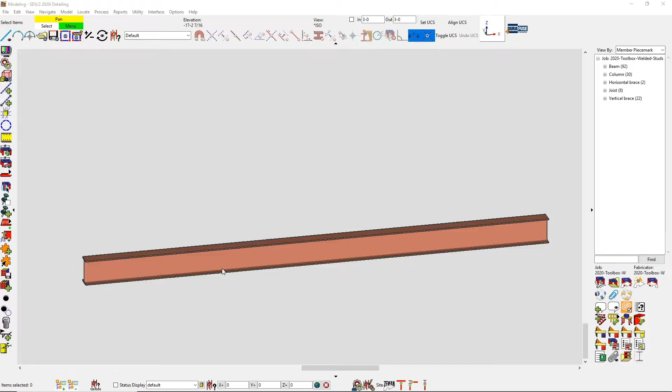This welded stud component can be added to beams or columns, and then it can be a shear or a threaded stud. If it's a threaded stud, you have the ability to add the nut and washer, but we're going to add a shear stud for this example.

When this is selected as a beam, you can add it to the top or bottom flange, the far side, or the near side web. When it's a column, it will be face A, B, C, and D. For your pattern setting, you have fixed or equal spacing. And for this spacing, we're going to put 2 feet.

You do have the option for a pattern underrun. This example will leave it at left end, but we'll show right and equal spacing as well. You have a stud column quantity of 1 or 2. The distance between that for the column, if you want an offset, and then if there's 2 columns, then you can do your pattern. Then you have your minimum lengths for fixed or minimum.

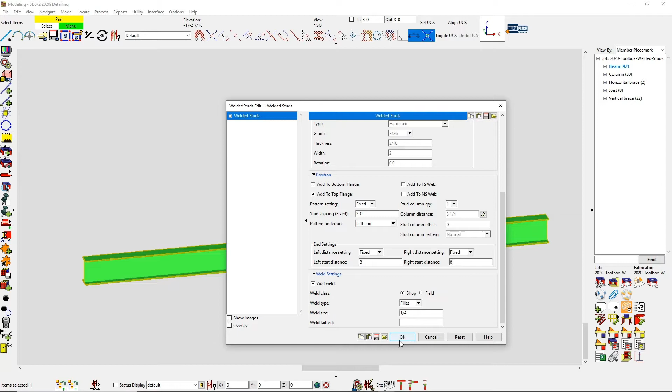You do see here I had my underrun for my left end, but I can change that then to my right end as well. And then we'll finish it off by showing that you can have it set to equal on both ends.

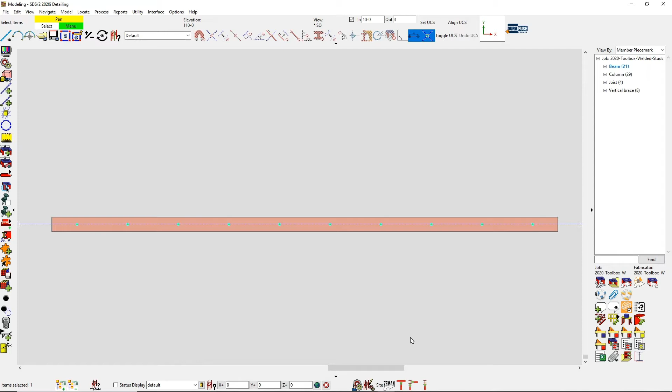Now, more commonly, you will have the left end setting and right end setting to maybe be a minimum distance or a minimum length. If that's set to that, then the pattern underrun is grayed out. If I want different spacing variations, then I will want to run this component twice. So left end maybe 24 inches and right end 18 inches.

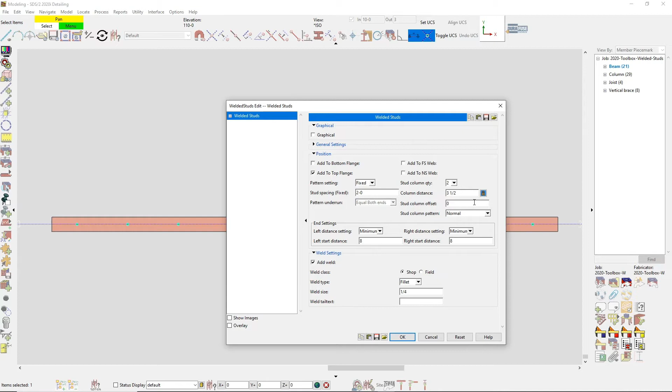This example, I'll do my stud column quantity of 2. This is a known issue right now, but the column distance is supposed to read the gauge line. I know this is supposed to be 3.5, so I'm just going to put 3.5 right now. I had that set to normal for my column pattern, but I can set that as staggered. So I'll start in the back, or I can do the reverse where it could start in the front.

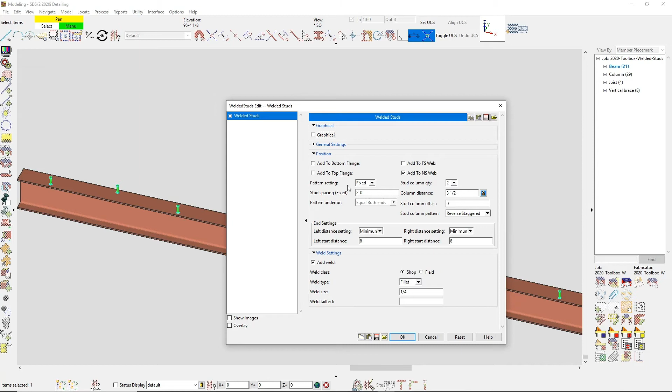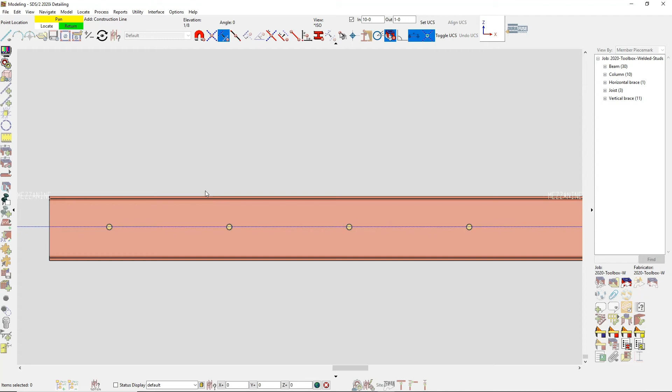We can also add this to my near side, and I could add it to the top flange at the same time, but I'll just change to my near side web. And I'll change this to just be 1 column. So you can see that it will center it at half the nominal depth. I know this is going to be 6 inches for my nominal depth. There is a request to put this for actual distance for half of it. In that case, if you need to do the actual, then you could put an offset in there.

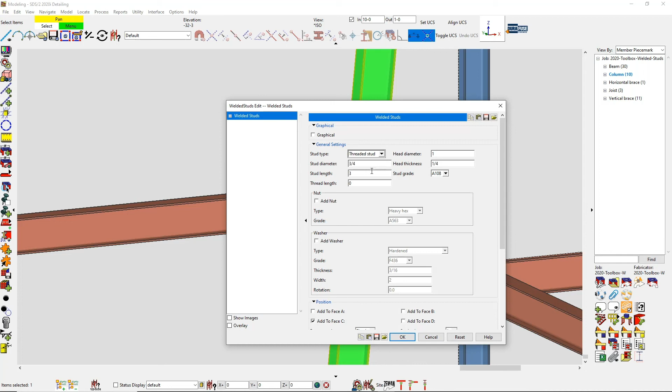This also does work on columns, even if they are sloped. Once it's a column, then you'll see the position changes to face A, B, C, and D. In this example, I'll just change this to a threaded stud, just with 1 column.

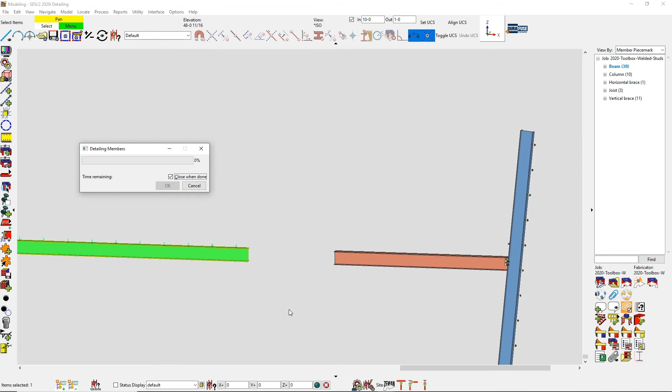Along with the component, we have added templates to this. So I'll show the beam and the column as well. You have the distance to the first stud, and then the last stud, and then the spacing in between. And then I'll also show the column. It's the same thing.

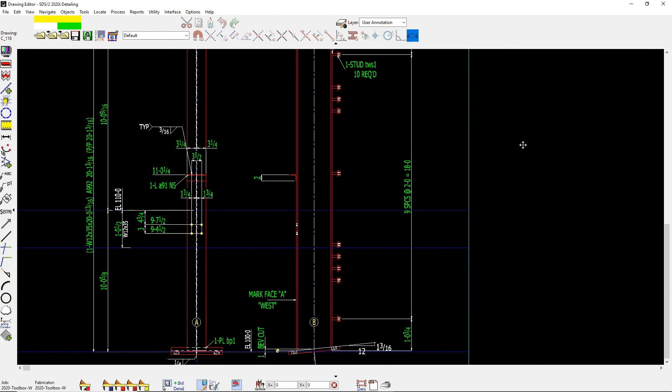And then we'll finish this out with: you do have the setting options in your component if you always wanted this to be a threaded stud instead of a shear stud by default.